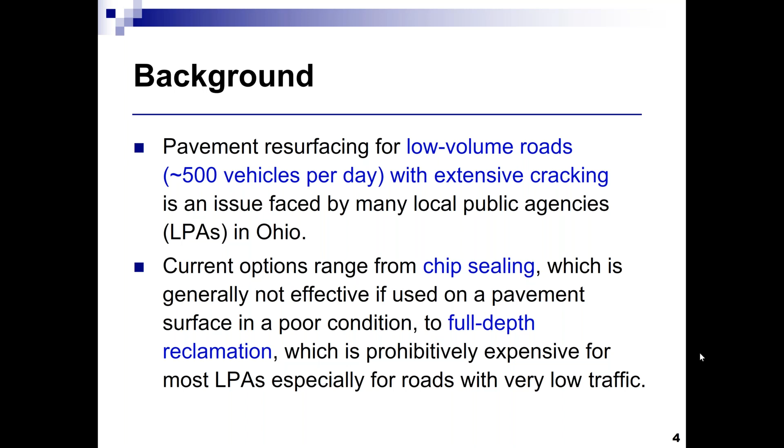Pavement resurfacing for low volume roads with extensive cracking is an issue faced by many local public transportation agencies, including those in Ohio. Current options range from chip sealing, which is generally not effective on a pavement surface in poor condition, as shown in previous ODOT research, to full depth reclamation, which is prohibitively expensive for most local public agencies, especially roads with very low traffic. We're looking at roads with about 500 to 1,000 vehicles per day, with very few trucks.

Another resurfacing option used by some agencies is called motor paving, which is cold mix asphalt paved on site and followed by chip sealing. Several agencies reported being satisfied with this mix because it provides a resilient mix that conforms to the existing pavement.

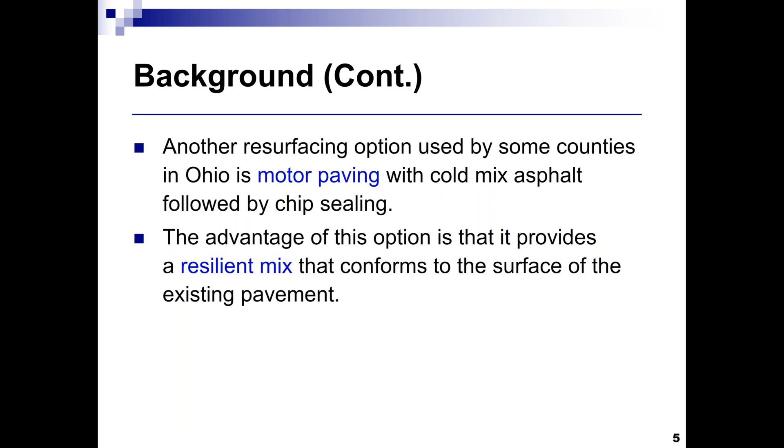However, this application is not widely used in Ohio because the equipment is not widely available. As an alternative, hot mix asphalt is more common, and there was interest in producing a mix comparable to the motor paving mix that is resilient, can be produced in a traditional asphalt plant, and can be placed using traditional paving equipment.

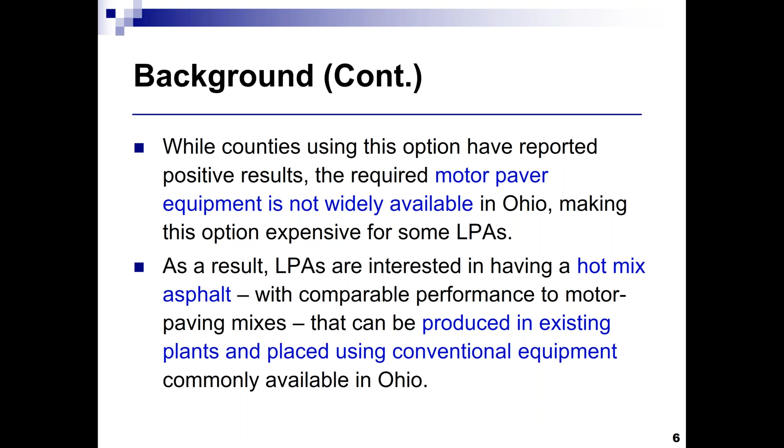The objectives of the study are to assess the current state of practice for pavement resurfacing alternatives used by local public agencies in Ohio, recommend a cost-effective mix design for an asphalt mixture that is resilient to cracking and environmental conditions prevalent in Ohio, and validate the proposed mix design through laboratory testing and in-field evaluation.

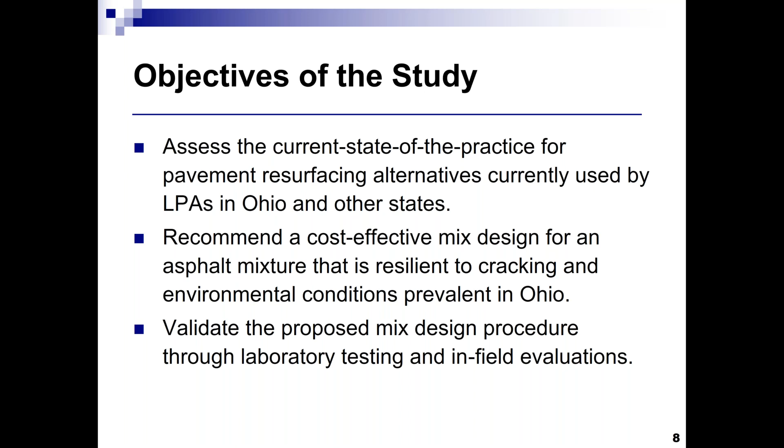Again, the focus here is really to come up with an asphalt mixture that is resilient to cracking. Even if it cracks, it can deform back and not make the cracks more severe.

The research approach: this project was conducted in two phases. In the first phase, we conducted a comprehensive literature review, then a survey documenting the current state of practice for pavement resurfacing for low volume roads. We proposed a mix design for an asphalt mixture expected to provide what we're looking for, a resilient mix, and then conducted laboratory testing to evaluate the performance of this asphalt mixture.

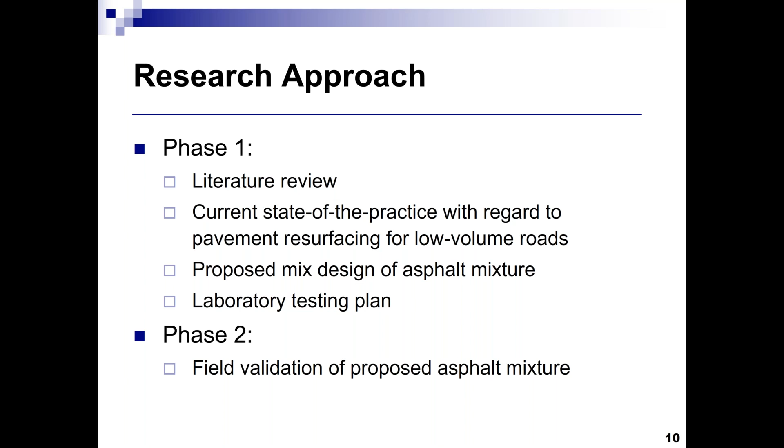Anything tested in the lab, in order to make sure it is usable, has to be validated in the field, and that was done in the second phase. The second phase lasted about 6 months, so field evaluation is still ongoing, and based on long-term performance, we're going to judge the performance of the proposed asphalt mixture.

So in phase 1, following the literature review, the focus was on what kind of asphalt mixtures are used for low volume roads, including those with cracking and those without cracking. What we observed is that lots of asphalt mixtures use larger aggregates because they require a smaller amount of asphalt binder content. Larger aggregates have a smaller surface area, so you need less asphalt binder to coat them.

So that was one strategy for basically using asphalt mixtures for low volume roads. The other strategy was going in the opposite direction, using very fine aggregates so that you can reduce the thickness of the asphalt overlay. If you use large aggregates, you will need a thicker asphalt lift, whereas if you go for a smaller aggregate, you can use a thinner asphalt overlay. So these were two approaches.

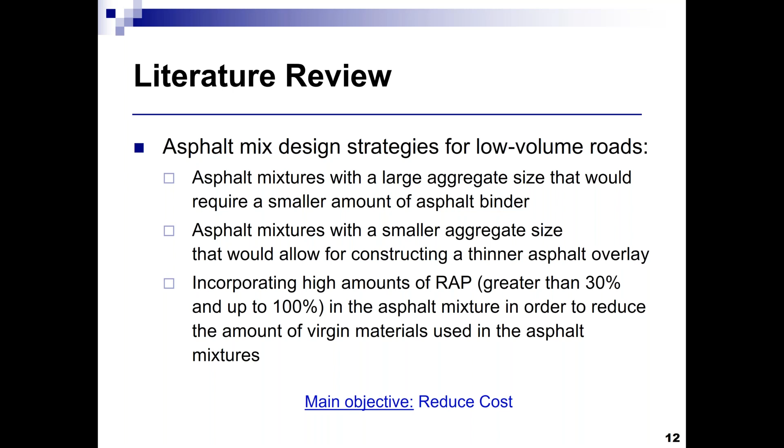The other approach was basically incorporating high amounts of RAP, greater than 30% and up to 100%, in the asphalt mixture, in order to reduce the amount of virgin materials used. The emphasis in all three methods is to reduce cost, whether you're increasing the size of the aggregate to reduce the amount of asphalt binder, reducing the size of the aggregate so you can get a thinner overlay, or incorporating a higher amount of RAP so you can reduce the amount of virgin asphalt. All of them emphasize the cost of the asphalt mixture and the need to reduce it.

As part of phase 1, we also conducted a survey. The survey was sent out in September of 2018. We collected the responses in the following month, so we were basically done in October of 2018. In the following slides, I'll go over a quick summary of what we found in the survey.

We had about 28 state agency representatives responding to the survey, and about 100 local agency representatives responding. Sometimes with the state agencies you may have multiple people responding to the survey - for example, with ODOT, you can have the central office and some district offices responding. So it's not all unique state agencies, but these are representatives representing specific geographical locations, whether within Ohio or outside Ohio. So what did we find based on the responses from the state agency representatives?

You can see that chip sealing - and again, the question here is for low volume roads that exhibit extensive cracking, how frequently are the following resurfacing alternatives used in your jurisdiction? Looking for the yellow, blue, and orange, you can see that chip sealing is sometimes, frequently, and extensively used. Some of the other alternatives, like double chip seal, cold in-place recycling, hot in-place recycling, full depth reclamation, are reported to be sometimes, frequently, or extensively used. Asphalt overlays tend to be on the high end with big blue and orange. Motor paving is not used by state agencies. Reconstruction is another alternative they may resort to.

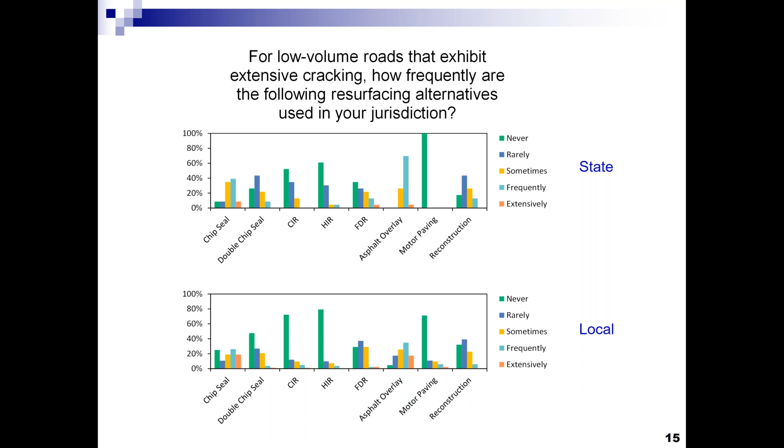Comments about what kind of asphalt mixture or rehabilitation strategy is used for the asphalt overlay - at the state level, it seems like most representatives implied using basically 2 to 4 inches, with 2 to 3 inches being more common as an asphalt overlay. Thinlays are used by some states, and chip seal is sometimes used as an interlayer to prevent reflective cracking. At the local level, up to 3 inches, mostly 2 inches or less.

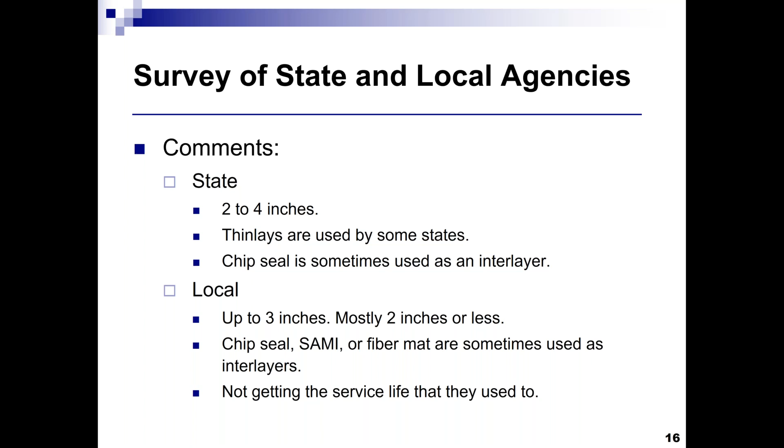Chip seal, SAMI, or fiber mat are sometimes used as an interlayer to mitigate cracking. And several agencies reported that they're not getting the service life they used to from these overlays.

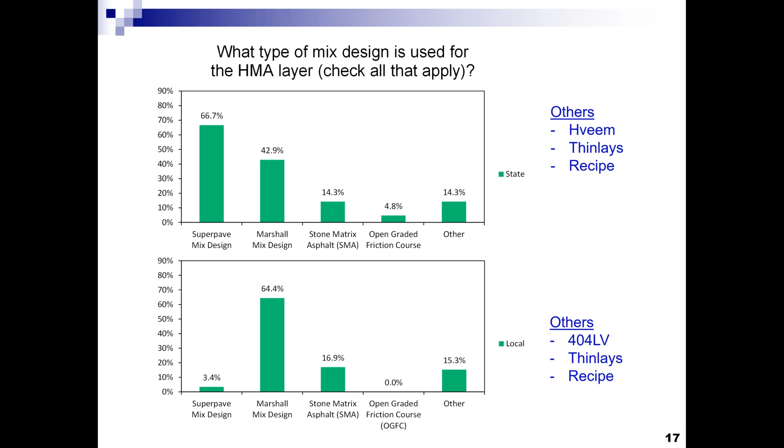In terms of what kind of asphalt mixtures or design is used, you can see that at the state level, Superpave is the most common. At the local agency level, Marshall is the most common, but some other agencies have experimented with other types of mixes. In addition to Superpave, Marshall, Stone Matrix Asphalt, and Open Graded Friction Course, Hveem and Thinlays and recipe mixes have been used by state agencies. At the local level, 404LV, Thinlays and recipe mixes have been used for the asphalt layer.

So following the survey, we identified two types of asphalt mixtures that seem to be common for roadways with cracking. One was based on using a larger stone asphalt mixture with a recipe mix design, and the other was based on using the 404 low volume traffic mix, but that one tends to be not very useful if you're using it on a roadway with cracking.

It performs better if you put it on a roadway that has more remaining service life. So we started looking a little bit closer into the other alternative, which is the larger stone mix.

Medina County reported basically using a mix design that is similar to the mix design used in motor paving. However, it's produced as a hot mix asphalt, not as a cold mix asphalt. The composition of this asphalt mixture was 90% number 57 limestone and 10% natural sand. Aggregates conform to ODOT specifications. They used PG 58-28 asphalt binder, and they used an asphalt binder content of 4.3%.

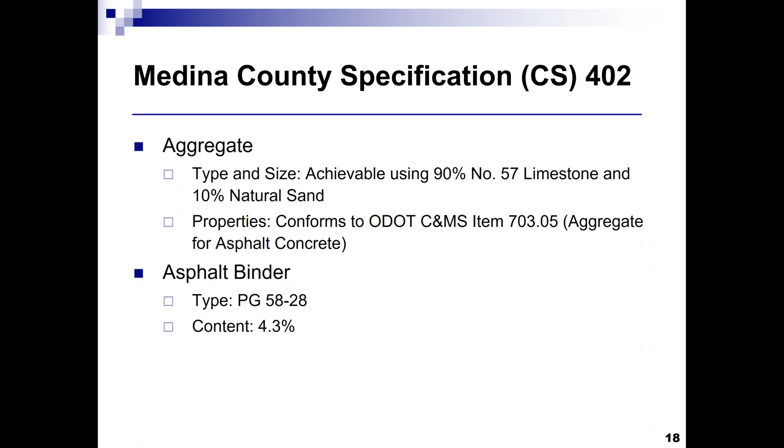So the process for construction for the motor paving and the Medina County Specification 402 is similar. It starts with basically pavement repair. You cannot basically put this asphalt layer on top of a pavement that has clear damage. You need to basically do the pavement repair before you start with the construction. Milling sometimes is needed, sometimes it's not needed, depending on the condition of the existing road.

Tack coat, you typically use tack coat if you're dealing with hot mix asphalt. However, you don't need it if you're dealing with motor paving. From our experience with this particular asphalt mixture, if the mixture is rich with asphalt binder, you can get away with less tack coat or even no tack coat, as I will discuss later. But again, the current specifications require tack coat.

You need a 2-inch asphalt overlay that is constructed using the Medina County Spec 402. You initially roll this asphalt mixture, you choke it with number 9 aggregates, then you compact it again, and then you go with the chip sealing. So this is the current process for Medina County 402 as compared to the motor paving mix.

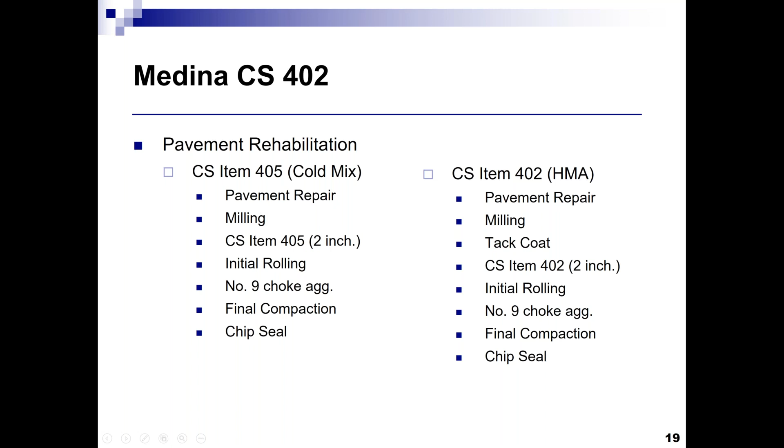So it's very similar. We wanted to optimize the composition of the Medina County Spec 402, and we followed this approach basically in this optimization. We started by basically looking at different aggregates and understanding their physical properties. We selected different asphalt binder contents to mix with different aggregate proportions, and then we used several laboratory tests to basically evaluate the performance of this asphalt mixture.

We used something called the IDEAL-CT, which is similar to the indirect tension or IDT test. I will be showing pictures about these tests, and I will be explaining and discussing them in more detail. We use this IDEAL-CT, indirect tension test, as a screening test, and if it met the performance criteria, we went through a more thorough evaluation where we used a larger number of tests to evaluate the performance of the asphalt mixture. So the IDEAL-CT test would basically tell us about the propensity of the asphalt mixture to cracking.

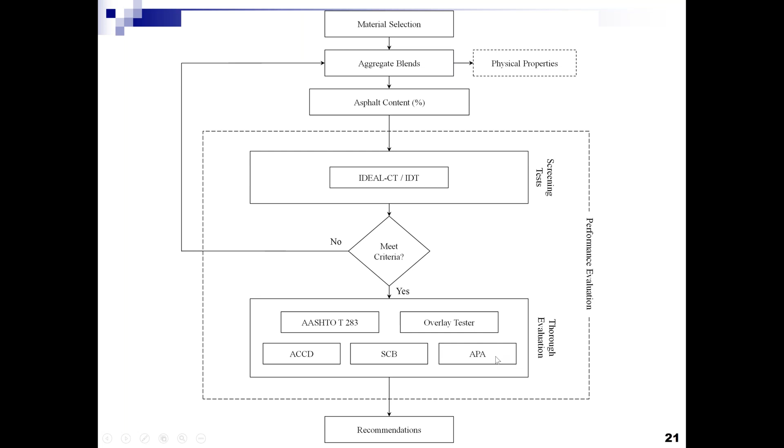The AASHTO T283 would basically give us the propensity of the asphalt mixture to moisture-induced damage. Texas Asphalt Overlay Tester would basically give us also performance with regard to fatigue cracking. Asphalt concrete cracking device would give us the low temperature performance. The SCB, or semicircular bending test, sometimes also called the IFIT test, would give us the propensity of the asphalt mixture to cracking. The asphalt pavement analyzer would basically give us the propensity of the asphalt mixture to rutting.

So let me go over these individual tests here. The IDEAL-CT test, which is again a test that basically looks at the cracking potential of the asphalt mixture, looks at the load versus deformation curve that is obtained while loading the specimen along its diameter. It takes into consideration not only the loading to failure, but it also looks into the post-failure behavior.

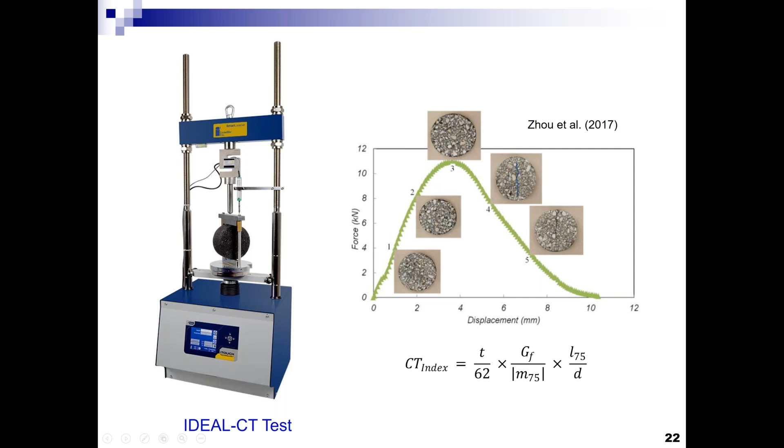It uses this index, called the CT index, to evaluate the cracking potential of the asphalt mixture. T is the thickness of the specimen. GF is the energy generated during loading in the pre-failure and post-failure range. M is the slope in the post-failure range. L is the deformation to get to the post-failure range, and D is the diameter of the specimen. So it looks into multiple factors to assess the cracking potential of asphalt mixtures.

The SCB is similar to the IDEAL-CT test. Instead of using a circular specimen, we take a semicircular specimen with a notch cut in the half of this semicircular specimen, and it will give us load versus deformation. We analyze it in a similar manner to the IDEAL-CT test, and we get a cracking parameter called the flexibility index.

Rutting is measured using the APA, a device that measures rutting. You have steel wheels that go on top of a rubber hose pressurized to a similar pneumatic pressure as vehicle tires, and it goes back and forth on the specimen while we monitor the accumulation of rutting on these specimens.

The Texas Overlay Tester uses a specially shaped specimen that is pulled and pushed back to evaluate the fatigue behavior of the asphalt mixture. We're looking at how many cycles are required to cause this specimen to crack.

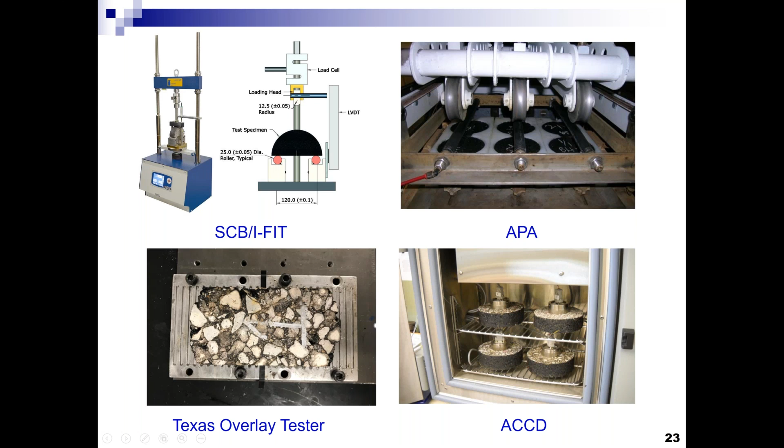The asphalt concrete cracking device is used to evaluate the low temperature cracking performance of asphalt mixture. We have an asphalt mixture specimen cored in the middle. We introduce an invar material in this middle, then put it inside an environmental chamber and start cooling the asphalt mixture. When you cool the asphalt mixture it wants to shrink, but the invar material prevents it from doing so, and eventually it will crack. So we're looking at what is the cracking temperature at which the material will actually crack.

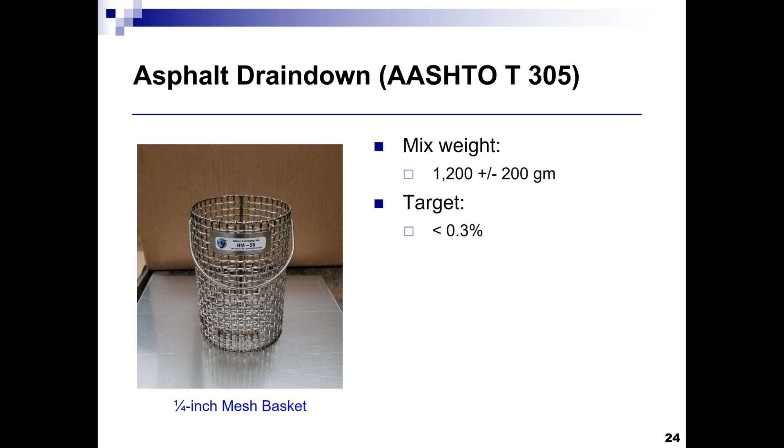In addition to all these tests, since this mixture uses larger stone aggregates, like number 57 limestone or number 57 gravel, we use the asphalt drain down test to check for asphalt drain down and make sure that the asphalt mixture is not too rich in asphalt binder. The idea is that the more asphalt binder we add, the more resilient the mixture will be. However, the more asphalt binder we add, the more susceptible the asphalt mixture becomes to rutting, and the potential for asphalt drain down might be there. So again, we use this test to check for asphalt drain down and make sure the mixture is not too rich in binder, causing other problems.

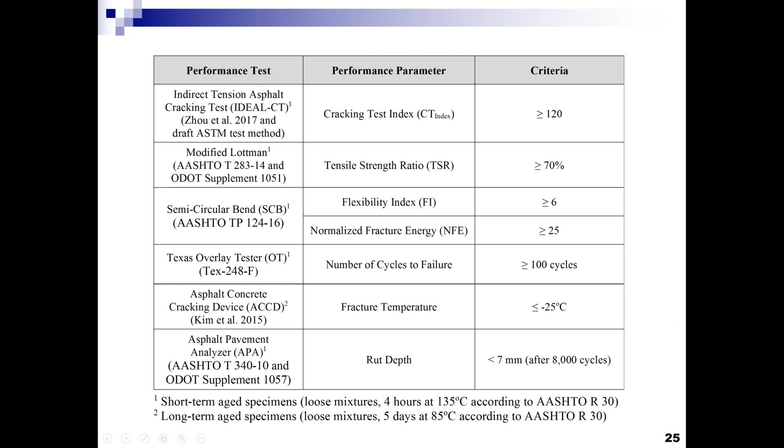The criteria presented in this slide were used to judge the performance of the asphalt mixtures used during the screening evaluation and the thorough evaluation. So again, we have the CT index, AASHTO T283, SCB test, Texas Overlay Tester, ACCD test, and APA test. You can see here the performance parameter of interest and the corresponding criteria for each test.

As part of the screening evaluation, we varied several factors to evaluate their effect on the performance of the asphalt mixture as measured using the IDEAL-CT test. We first varied the type of the asphalt binder. We kept the same aggregate composition, 90% number 57 limestone, 10% natural sand, and used different asphalt binders at an asphalt binder content of 4.3.

In this step, we wanted to check whether Medina County, which currently uses 58 minus 28, should really be using a different asphalt binder. 64 minus 22 is common in Ohio, but 52 minus 28 is not common. Still, we wanted to check if this asphalt mixture would benefit from using a different asphalt binder.

Looking at the effect of aggregate gradation and asphalt binder content, based on what we observed, we found that PG 58 minus 28 was still the best asphalt binder of the three. So we decided to keep it and start varying the aggregate gradation.

We reduced the amount of number 57 aggregates and increased the amount of natural sand, and along with it looked at different asphalt binder contents. Based on this evaluation, we found that of these three aggregate proportions, 80% number 57 and 20% sand seemed to give the best results, so we decided to move forward with it. But one other thing we wanted to look at is, okay, we have 58 minus 28.

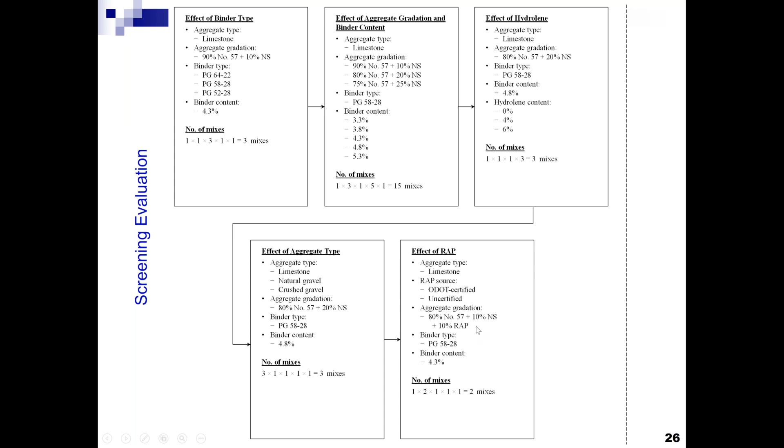We also looked at the effect of RAP, if we substitute some of these virgin aggregates with RAP, and some of the virgin asphalt binder with RAP binder, what will happen to the performance of the asphalt mixture? I'm not going to go into the results of the screening evaluation for the sake of time, but I will go into the results of the thorough evaluation.

Based on the results of the screening evaluation, we decided to primarily focus on number 57, 80% number 57 and 20% natural sand as the main focus of our mix design. We kept the 90% number 57 limestone and 10% natural sand as our control, because that was the material used in the Medina County specifications.

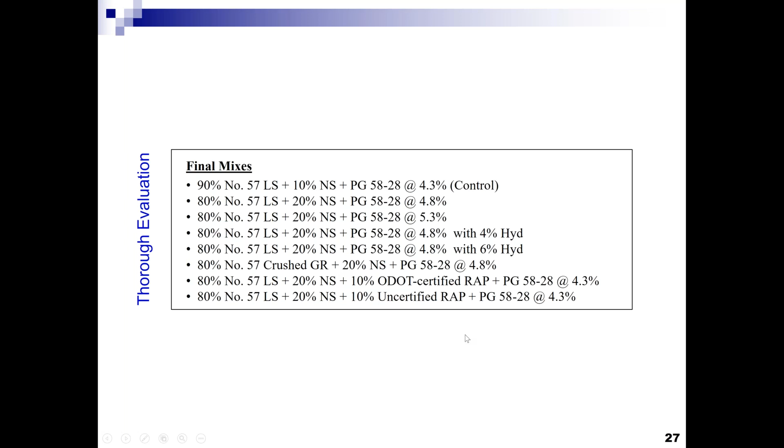Then we started looking at the effect of the other variables on this asphalt mixture. We have 4.3, we went into 4.8, 5.3. We looked at the 4.8 with Hydrolene and without Hydrolene. We looked at crushed gravel instead of only limestone. We also looked at different kinds of RAP, ODOT-certified and non-ODOT-certified RAPs. In the following slides, I'll be going over the results we obtained for these asphalt mixtures.

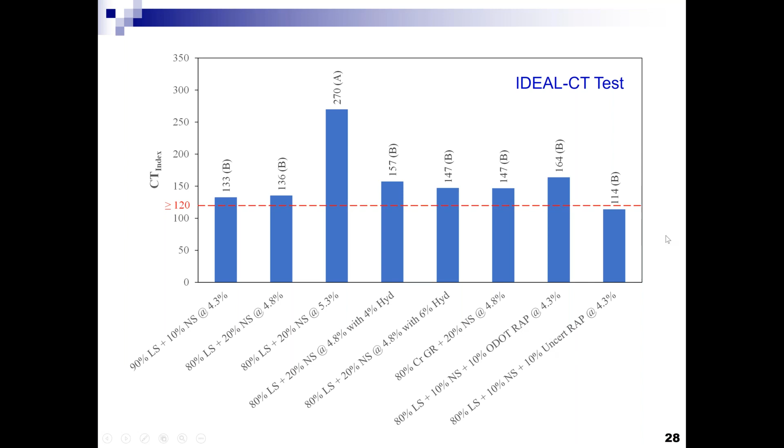The use of aromatic oil was also shown to benefit us in terms of cracking, so this was something we were interested to further evaluate. Crushed gravel gave us reasonably good performance. RAP, it depends - sometimes we did get better results, sometimes we didn't get as much benefit from the RAP, and there are other factors that come into play when it comes to the decision about what to choose.

The SCB flexibility index is similar to the CT index obtained using the IDEAL-CT test, and the results were highly correlated, where with increasing asphalt binder content you can clearly see there is an advantage of adding more asphalt binder content to this asphalt mixture. The 80%-20% combination also gave us higher results than the 90%-10% combination.

This is really due to the combined effect of the aggregate gradation. We're going finer, so it becomes a little more resilient, and we're adding a little more asphalt binder content, so it becomes a little more resilient. One thing we came to quickly in this research project is that this asphalt mixture will probably benefit from having more asphalt binder content, and it seems like making the aggregate gradation a little finer will also be helpful. Again, mixing the asphalt binder with aromatic oil seemed to help a little, and the crushed gravel did not seem to significantly affect the results with regard to cracking resistance.

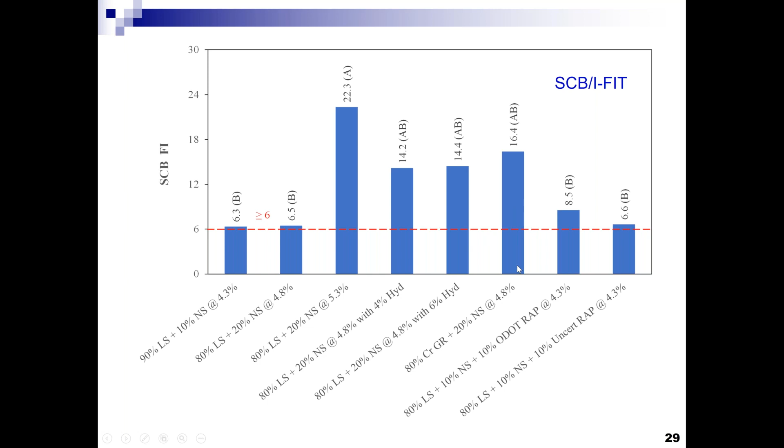These are really good crushed gravel aggregates - you're looking at more than 90% crushed faces here, so these are well-crushed aggregates. RAP again gave us better results than the control, but it was still low for cracking performance. With regard to the low temperature cracking, here we basically got minus 28.5.

We're getting basically minus 27.2, minus 27.5. The results are really close to each other when you're looking at plus or minus 1 degree.

Some of these mixtures that contain aromatic oil did actually improve low temperature cracking, and that's expected because these aromatic oils soften the asphalt binder and make them more resistant to low temperature cracking, but at the same time they reduce the strength of the asphalt mixture. So this is something we need to keep an eye on.

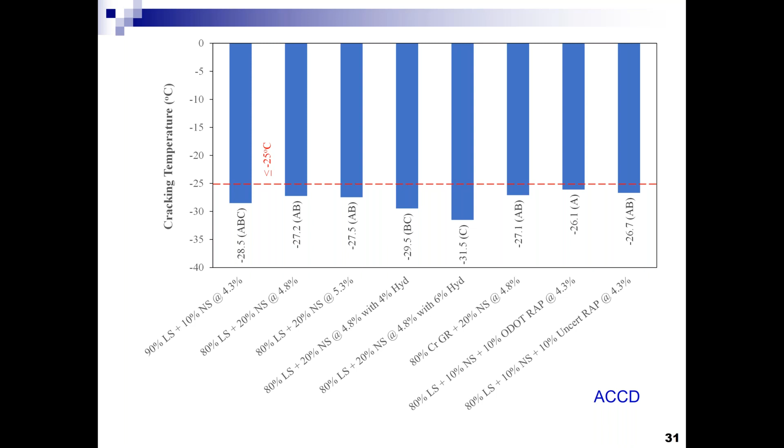In general, most of the asphalt mixtures obtained comparable low temperature cracking performance, a little bit lower for the RAP mixes, but still close overall to the other asphalt mixtures. We did not see any significant issues with rutting.

So, mixes to be considered for field evaluation. Based on the outcome of the first phase, it was recommended to make the aggregate gradation finer by using 80% number 57 and 20% natural sand, increase the asphalt binder content to 4.8 or 5.3, and stay with PG 58 minus 28.

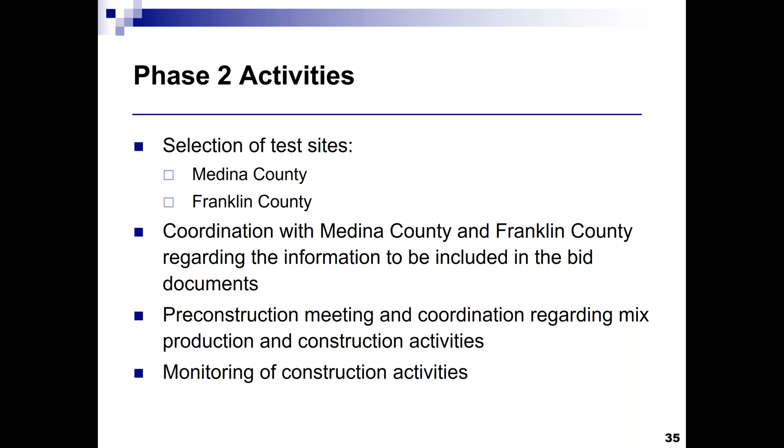We had a pre-construction meeting and coordination regarding the mix design and the production and construction activities. When construction took place, we were present. We also collected some loose asphalt mixtures that we tested in the lab to make sure that what was produced in the field is comparable to what was produced in the lab.

We conducted 3 evaluations, every other month, for both test sections to look at the initial performance of these asphalt mixtures, to get an idea about the long-term performance, which will take place over time. We agreed with both counties to continue evaluation at these sites to check the performance of these asphalt mixtures.

The construction in Franklin County took place on Kitzmiller Road in the New Albany area, and this site is located in the northeast region of Columbus.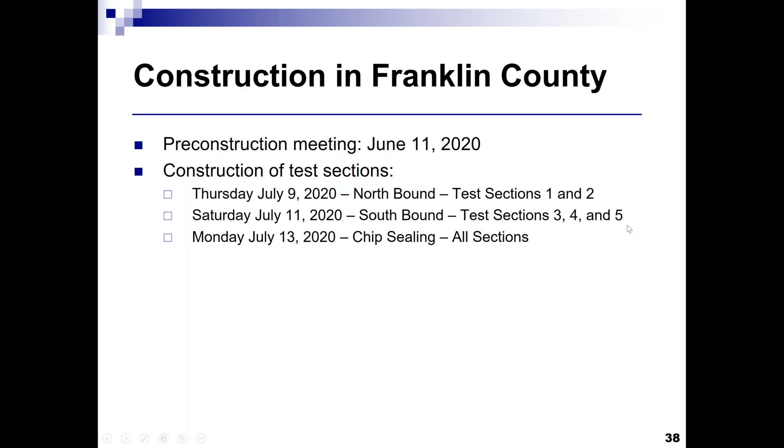The pre-construction meeting took place on June 11th, and the test sections were constructed on July 9th and July 11th, with chip sealing taking place almost immediately after construction, basically a couple of days later. We had 5 test sections at this test site.

In Medina County, the test site is located in the northwest region of Medina County, and it was conducted on Crow Road.

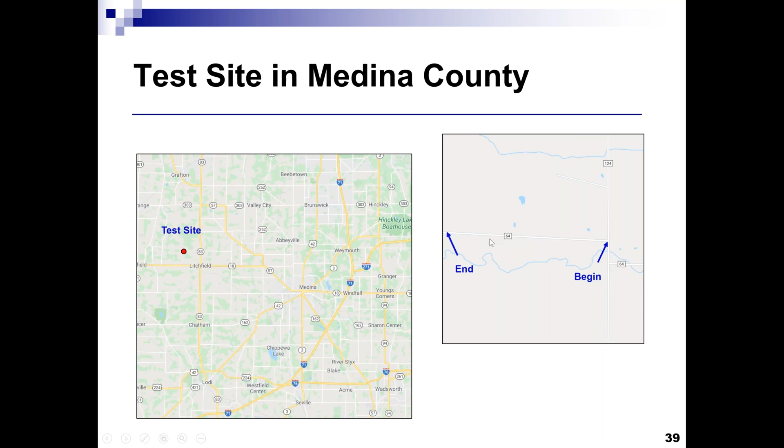We had our pre-construction meeting on July 23rd, 2020, and construction took place on Monday, August 3rd, with some interruption due to rain toward the end of the day, so we had to continue construction on Wednesday, August 5th. We had only 4 test sections at this test site.

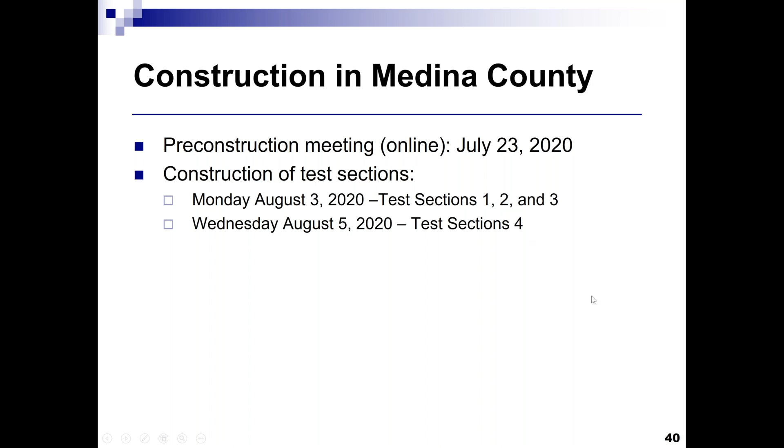We excluded the crushed gravel combination because crushed gravel is not commonly available in the Medina area and will not be used in the future, so we kept it only in the Franklin County test site, not in the Medina County test site.

In the following pictures, I'll go over the asphalt mixture production, placement, compaction, choking, and chip sealing, using pictures collected at the test sites.

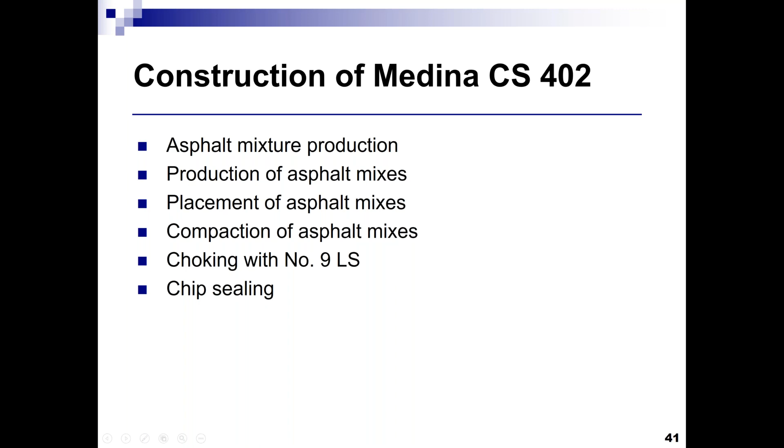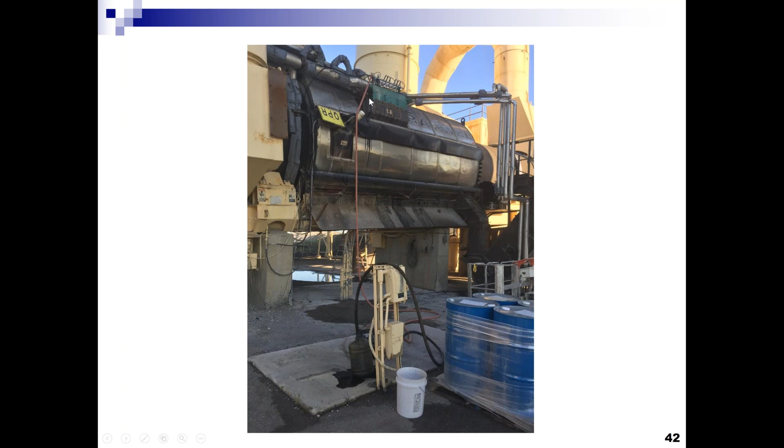This picture shows how the aromatic oil was introduced into the asphalt binder line at the plant. This is a double barrel green asphalt plant, and you can see there is a hose that connects the pump to the asphalt binder line - this is the aromatic oil that was used.

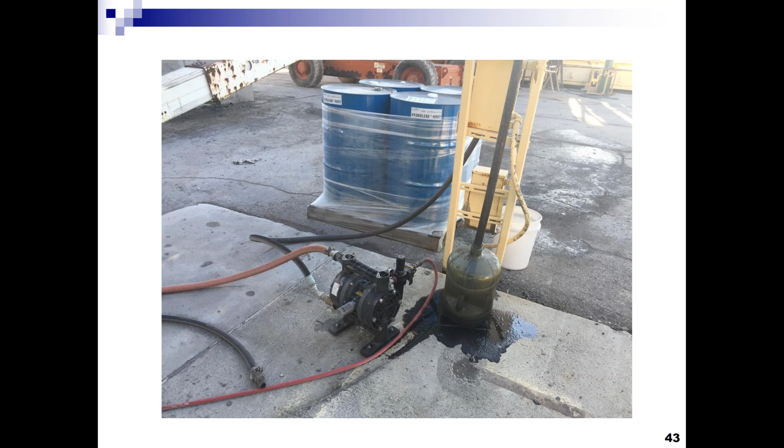So the amount of aromatic oil was basically metered in to achieve the required percentage of aromatic oil that we wanted to use.

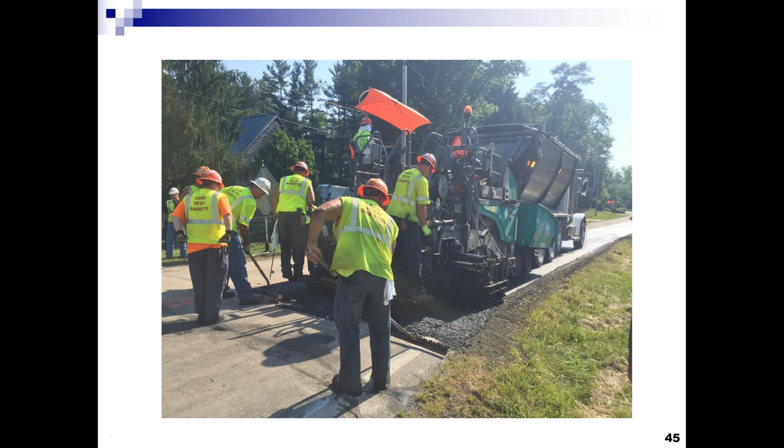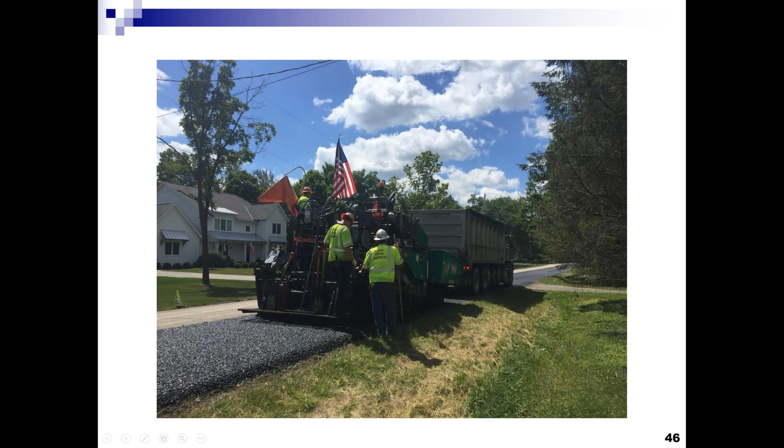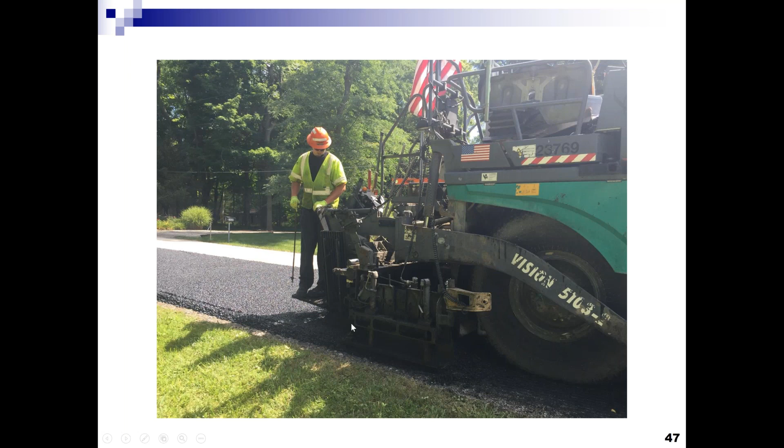I will be discussing the do's and don'ts during construction at the end of the presentation. Again, this is something that will be discussed. You can see here they're measuring the thickness of the asphalt overlay to make sure they can achieve the target thickness.

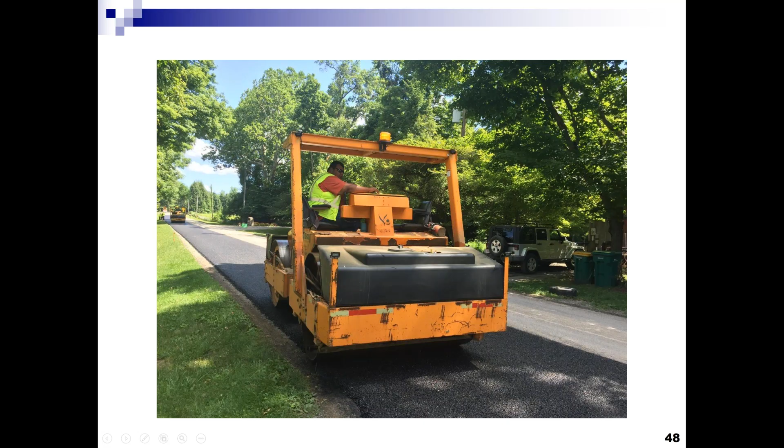They had two rollers on site to compact the asphalt mixture. This is how it looked like at the end of paving.

So immediately after the initial rolling, we basically had the aggregate choking. You can see the aggregate distributor, and you can see the roller for the aggregate distributor.

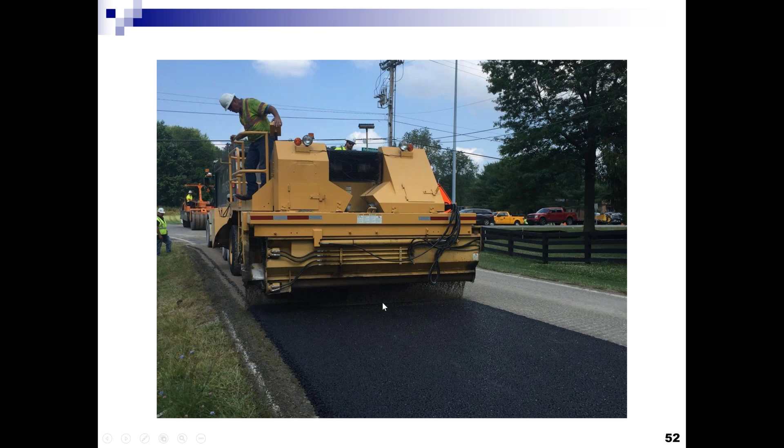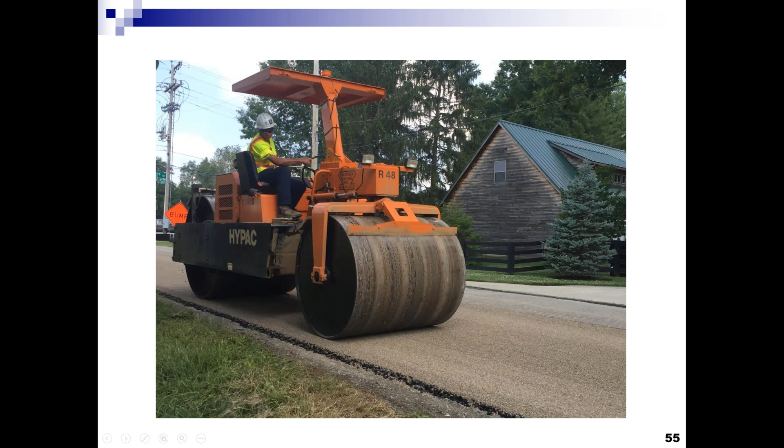You can see how the number 9 aggregate is spread in here, and you can see the rolling taking place, the final rolling.

At this particular location, they did have a little bit more aggregate placed than they needed on this side, so they ended up having to come and broom it before they did the chip sealing.

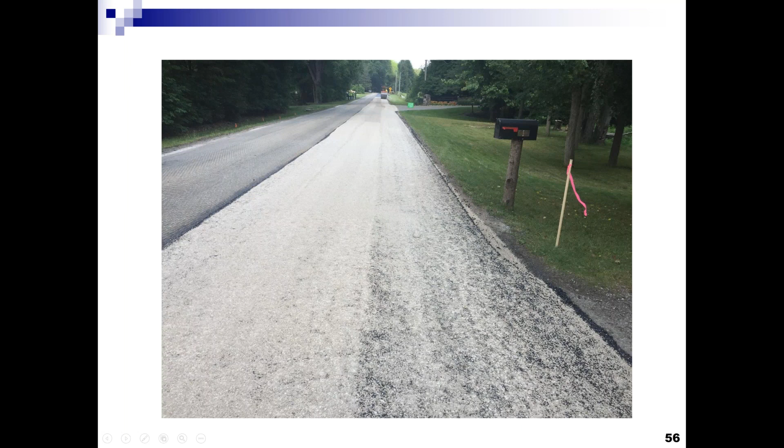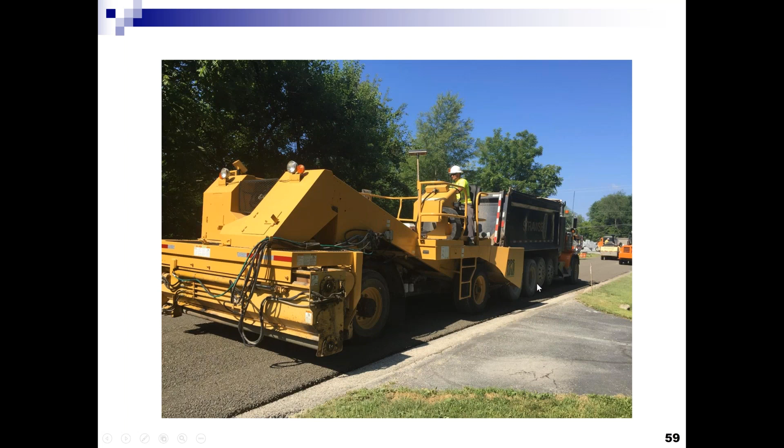So again, this is the chip sealing of Medina County 402, basically spreading the aggregates after the chip sealing, followed by compaction.

So recommendations for implementation. One recommendation was to make the asphalt mixture slightly finer, so we recommended changing the lower limit for selected aggregate sieves to make it slightly finer.

One thing observed in the second phase is that this mix will benefit from having more asphalt binder used in it. What will happen is that even if you have a little bit more asphalt binder than you need, it will basically drain down within the asphalt layer, so you're going to lose some of that. The higher it is, it's not going to be as bad.

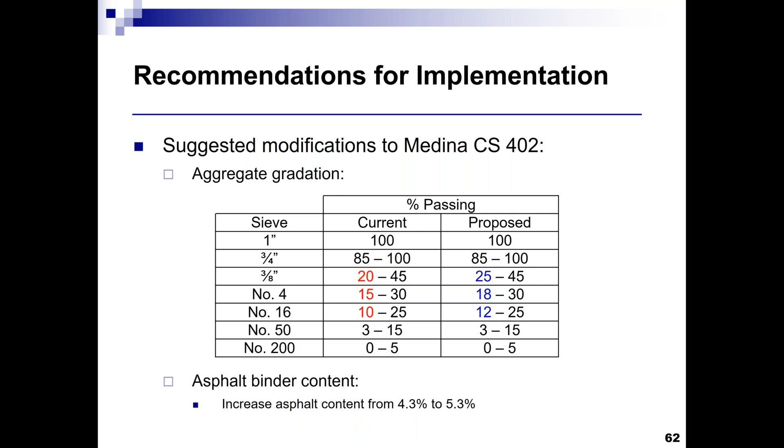But you don't want to go too high, because then you'll start running into an asphalt drain down issue even in the truck and so on. So as part of the recommendation between 4.8 and 5.3, it was recommended to go with 5.3. This way, even if the contractor ends up using a little bit less asphalt binder content, you still have a couple of percentage points included.

Continue to use PG 58 minus 28. Use either limestone or crushed gravel, and with crushed gravel we're looking at more like 90% crushed gravel. Use aggregates that have less absorption. Don't go with highly absorptive aggregates, because if you use aggregates that are highly absorptive, then you will need more asphalt binder content.

Use of aromatic oil: the laboratory results we obtained were promising, but in order to make a final decision about whether it's a good idea to use aromatic oil with this asphalt mixture or not, it's recommended to continue evaluating the performance of the test sections and determine whether it will be advantageous to use the aromatic oil, and at what percentage.

For asphalt drain down, it will always be good to include this test as part of the mix design, so that if the aggregate used is of lower absorption, and you may have any issues with asphalt drain down, you'll be able to pick that up before construction.

But it should be based on the testing we have, based on the aggregates we've used. You should be okay with aggregates that are of typical absorption to what we commonly have in Ohio, which is usually less than 3% water absorption.

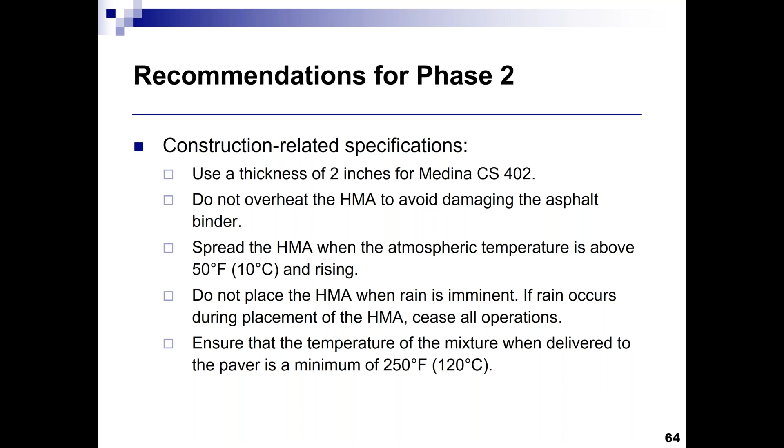Ensure that the temperature of the asphalt mixture when delivered is at a minimum of 250, so that you can properly compact it. Use tandem steel wheel rollers weighing 6 to 10 tons for compaction, and don't over compact the hot mix asphalt to the extent that the aggregate particles are crushed or broken. So you have to be very careful with compaction. The key point here is don't over compact, so you have to be a little bit careful.

Immediately following the initial rolling of the intermediate asphalt course, which is basically the Medina CS402, choke the placed hot mix asphalt using number 9 aggregates at a rate of 10 pounds per square yard. The aggregate choking helps fill the voids in between the larger aggregates, so when you come and chip seal it, or even go with an asphalt overlay, you will have less void space to lose any emulsion or asphalt binder in.

Chip sealing or an asphalt overlay is required on top of Medina CS 402 because this is a coarser asphalt mixture. It will have a more open structure, especially at the top, so you want to make sure the top of the asphalt mixture is sealed so that you don't end up with any damage in the winter due to water infiltration and freezing.

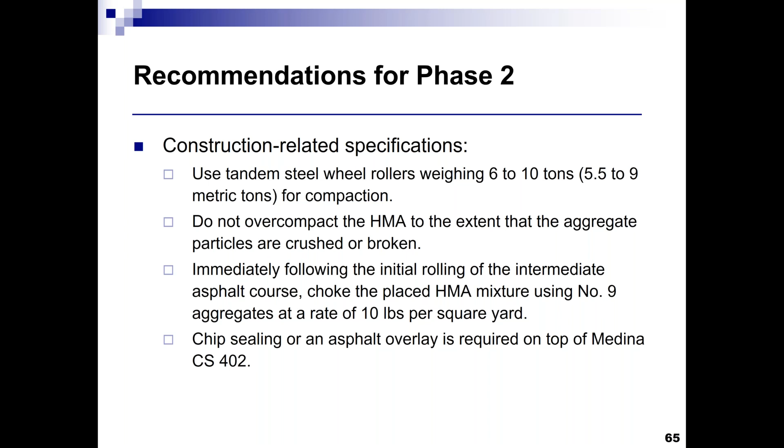And with this, this will be the end of my presentation. So maybe we can go to questions.

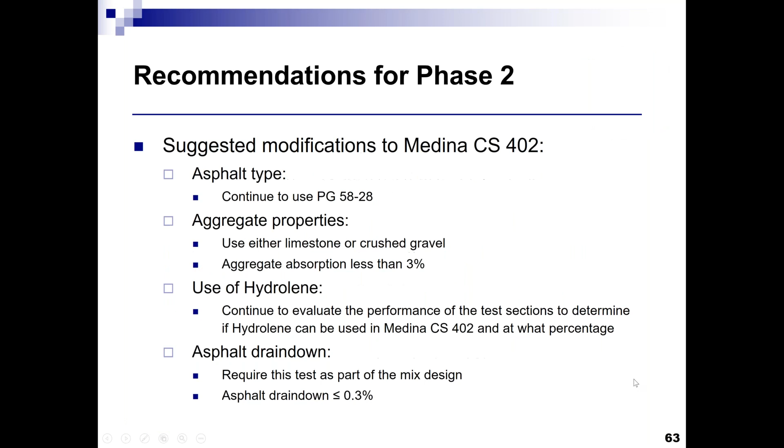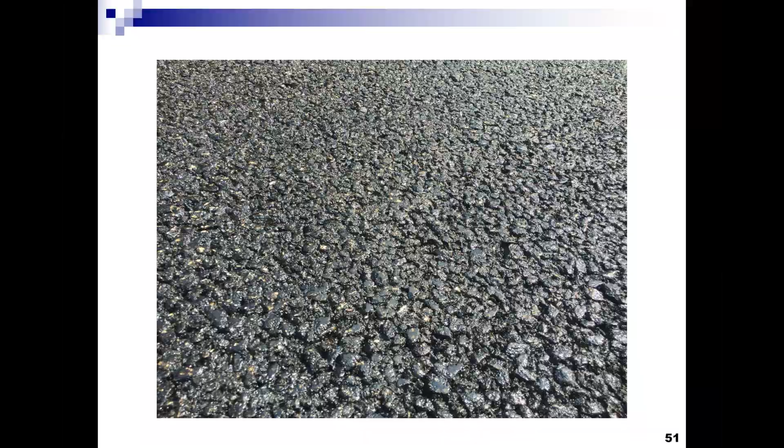I think the main thing is that the counties will continue to evaluate the long-term performance of these sections, and hopefully that will give us more information about how this mix will actually perform in the field. We're hoping to get what is expected from this asphalt mixture, in that it's a resilient asphalt mixture. We may have some cracking taking place in it, but the hope is that these cracks can sort of come back and close themselves because of how the mix is structured, the amount of asphalt binder used in it, and the type of asphalt binder used. It's a softer asphalt binder that can be mobilized with warmer temperature. So that's the hope from this asphalt mixture.

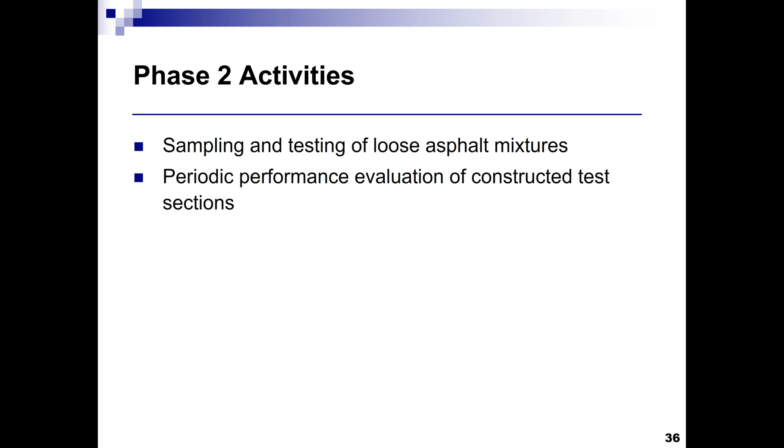We estimated that the cost for the asphalt mixture, if used in large quantities, is going to be around $80 per ton. Now in Franklin County, as I remember, it came at $120 per ton, because we're dealing with small sections and different mix combinations, and the contractor had to do some mix design as part of it. So it came at $120 per ton. In Medina County, because the quantities were even less and we had 4 sections instead of 5, it came out, I think, 160 to 200 in that range. I can't remember exactly, but we were expecting that, because that's common for test sections, that they will come at close to almost double what you would expect for a regular paving project.

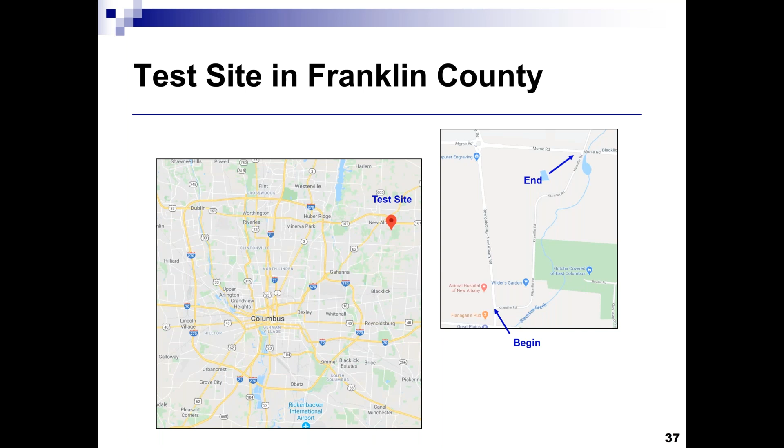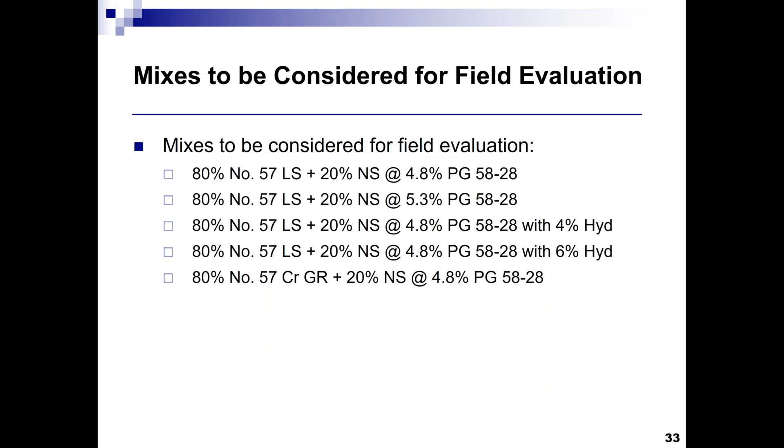Because we wanted this mix to be as rich as possible with virgin asphalt binder. The hope from this mixture is that, if we can get good field performance from it, we can start looking again at the RAP and see if we can incorporate more. But since the objective of this project was really emphasizing the resiliency of the mix, we thought let's use more virgin asphalt binder and less aged asphalt binder, similar to that used in the RAP, for this particular asphalt mixture. That was also observed in the test results, in that with more virgin asphalt binder, you get a little bit higher cracking indices. So we did not want to push the RAP too much in this asphalt mixture. We wanted to try to achieve something comparable to a normal paving mix with virgin materials. And then if it works, we can look again at how we can make that happen with more and more RAP.

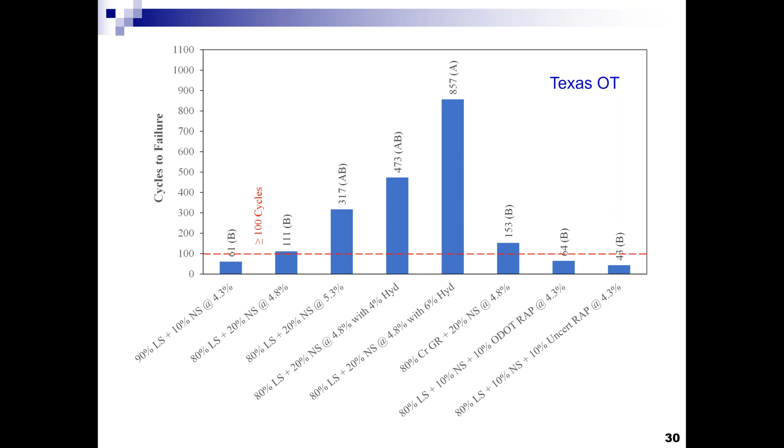Thank you, Greg. He asks, have you tested any of these mixes with the Hamburg test? No, we did not.